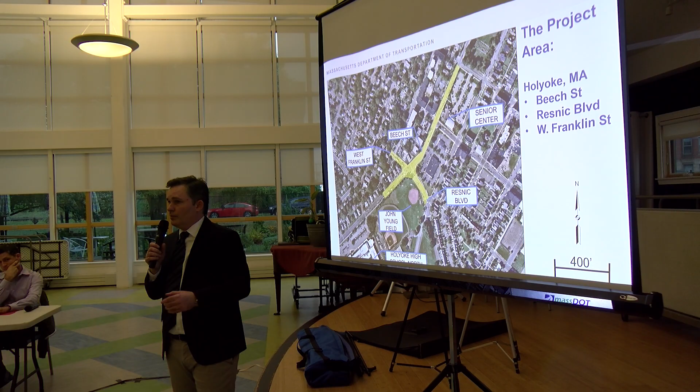Touching on what I referred to earlier, from 2015 through 2017, this intersection—Resnic Boulevard, West Franklin Street, and Beech Street—was in the top 200 of crash rates for the state. MassDOT has a program called the Highway Safety Improvement Program, a federal funding program that targets unsafe intersections. This intersection qualifies for safety improvement funding from Federal Highway because of its poor safety record.

In particular, there's a high rate of pedestrian crashes at the intersection—a statistically high number of pedestrians struck by vehicles while using the crosswalks.

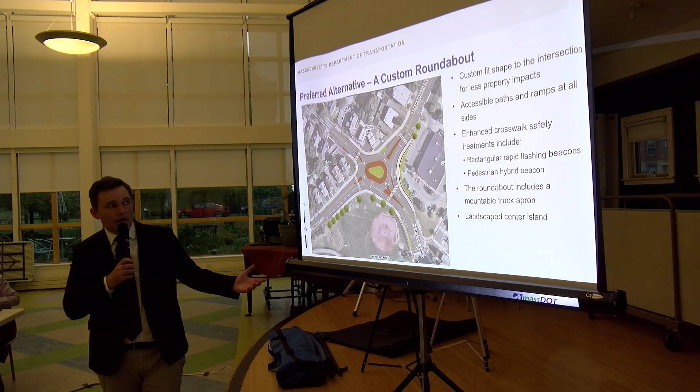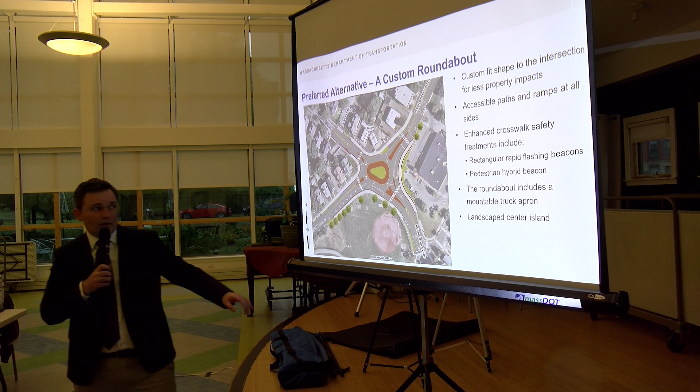The custom roundabout has a custom shape, designed specifically to fit the intersection and to accommodate the trucks that might be using it. You'll notice there are 2 lanes on the eastbound approach of Beech Street with a right turn exclusive lane. There's also 2 lanes on the northbound approach of Resnic Blvd, as there are today - we're keeping those 2 lanes. However, on West Franklin Street there's 1 lane in each direction, and on Beech Street coming westbound there's 1 lane approaching the intersection. That's all been designed based on the traffic volume at the intersection.

Where you see an extra lane, it's because there's a bit of extra traffic volume demand, and that extra lane is needed to prevent long queuing. We've also provided enhanced crosswalk safety at all 4 corners of the roundabout. 3 of the crosswalks - Resnic Blvd, Beech Street on the west side of the roundabout, and West Franklin Street - would have rectangular rapid flashing beacons. I'll show you a picture of that in a moment, but that's an enhanced type of crosswalk treatment.

Essentially, you press a button and a yellow flashing light lets drivers know a pedestrian intends to cross. The leg of the intersection on Beech Street on the east side actually has a different type of pedestrian safety measure - it's called a pedestrian hybrid beacon, which involves an overhead flashing light, adding a bit of extra safety. The roundabout also includes a mountable truck apron - the area shown in dark red color is slightly raised, but a large freight truck can mount that area to complete turns.

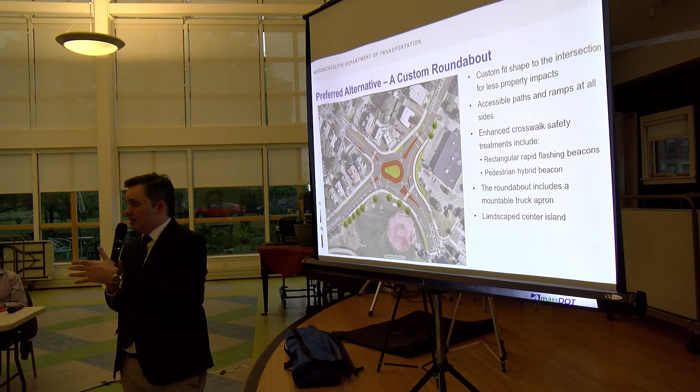The center island is shown as grass currently, but at 25% design we haven't finalized that landscaping yet, so that's something that can be refined at future design stages. We would certainly want the city to have input as to how the center of the roundabout is planted with landscaping, etc.

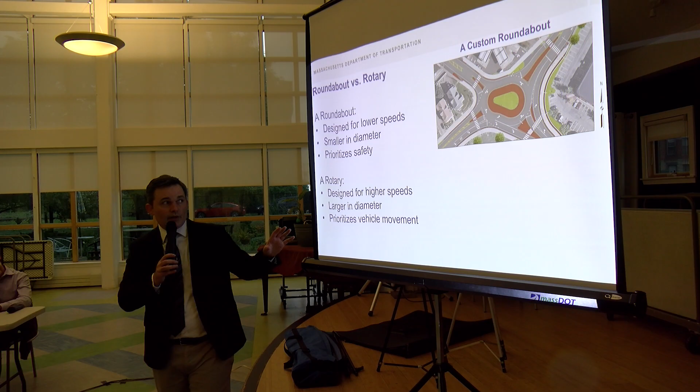I want to quickly touch on the difference between a roundabout and a rotary, since we often hear this question at public meetings. This project is recommending a roundabout, which is designed for lower speeds. It's primarily designed for safety and is less concerned with moving vehicles through the intersection quickly. A rotary is a little more old-fashioned - you don't see too many built anymore, but they do still exist in our state. They tend to be larger in diameter and try to get vehicles moving faster. They tend to be in places where fewer pedestrians actually cross the intersection, such as a highway interchange. The preferred alternative here is in fact a roundabout, not a rotary.

On Beech Street on the east side of the roundabout, we have something different called a pedestrian hybrid beacon. This is also a push-button activated overhead light, with a sequence: it flashes yellow, then flashes red, then becomes solid red, which requires cars to stop. When the pedestrian has finished crossing, it goes back to flashing red, meaning you can pass through if the pedestrian's finished. So it's a stronger safety control measure because it requires you to stop - it's not just a suggestion. But it doesn't create as much delay as a regular traffic signal because you can pass through after the pedestrian has completed their crossing.

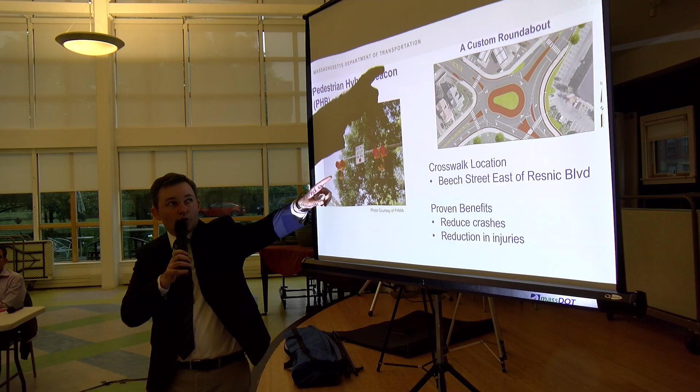The reason we needed that on the east side of the intersection is because there are 2 lanes of Beech Street exiting the roundabout, and studies have shown that when you have 2 lanes exiting a roundabout, vehicle speeds can get high, close to 40 miles per hour. So we want to keep pedestrians safe who are crossing that 3-lane crosswalk on that particular side of Beech Street, which is why we're using this enhanced safety treatment.

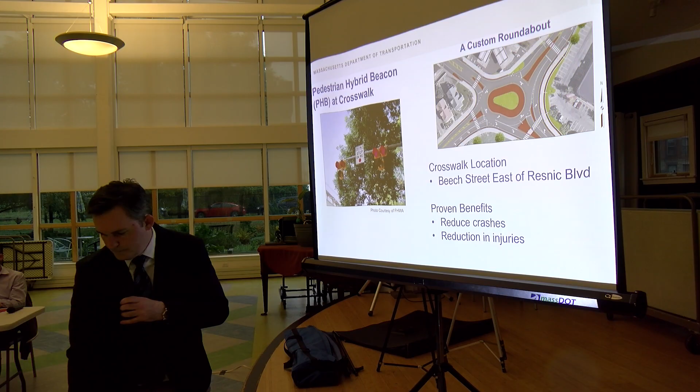I wanted to touch on trucks - I don't know if anybody here is from the fire department or school department. The roundabout has been designed so that school buses and the large ladder truck from the fire department can complete all turns without having to use the mountable apron - they can just use the regular vehicle lanes without going on the raised portion. The freight trucks will have to use the mountable portion of the roundabout. The largest vehicle this has been designed to accommodate is a 72-foot tractor-trailer truck, which is typical for a MassDOT design project and one of the largest tractor-trailers you'd see in a city context like Holyoke. That's the design vehicle.

Yes, the 40-foot bus, just like the ladder truck and the school bus, can make all turns without using the mountable apron of the roundabout.

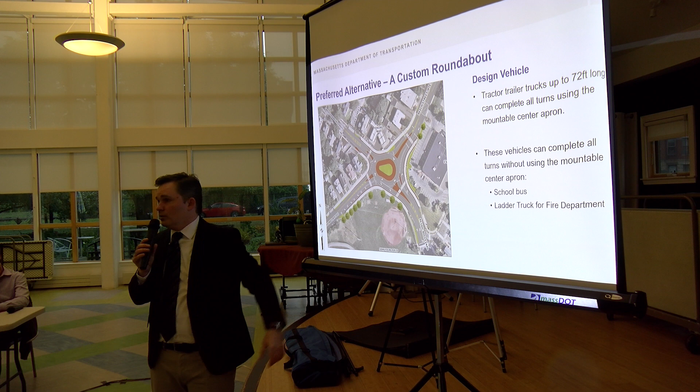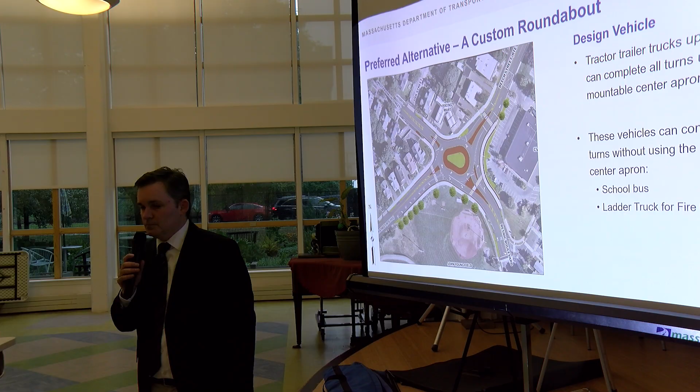The one that's on everyone's mind, I'm assuming that parade day and road race can get through there okay? Yes, the 72-foot truck is about as large as any of the floats you would see, in fact probably larger than any floats in the Holyoke St. Patrick's Day Parade.

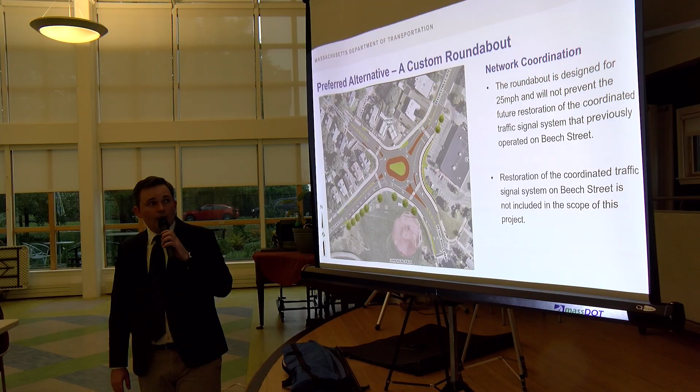I wanted to mention, we had a question from the public earlier. As many of you know, this part of Beech Street was formerly part of a coordinated signal system, pre-timed so the lights were coordinated at 25 miles per hour. That system hasn't been operating for some years, unfortunately, because the equipment is no longer working and is too old to be repaired. But this roundabout does not prevent that system from being repaired in the future. Repairing that coordinated signal system is not part of this project, but putting in the roundabout is compatible with a future repair of that system if the city so chooses.

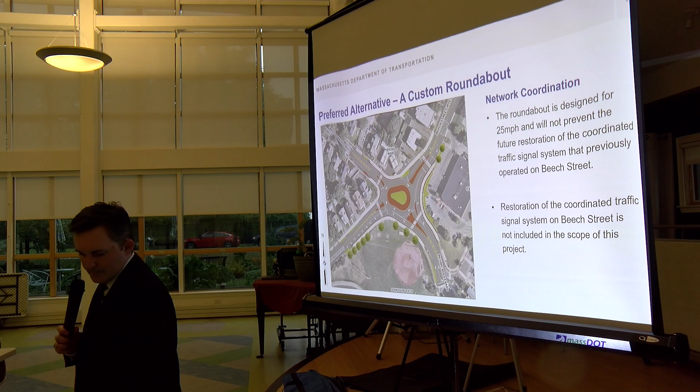Okay, so next I'm going to move around to each street leg approach to the roundabout and talk about some of the features of the design.

We'll start with West Franklin Street. As I mentioned before, this is one lane in each direction. There will be a rectangular rapid flashing beacon at the crosswalk. We have shared use paths on both sides of the road, and they have to transition back to allow bicyclists to enter and exit the shared use paths, so there are bike ramps where the shared use paths end.

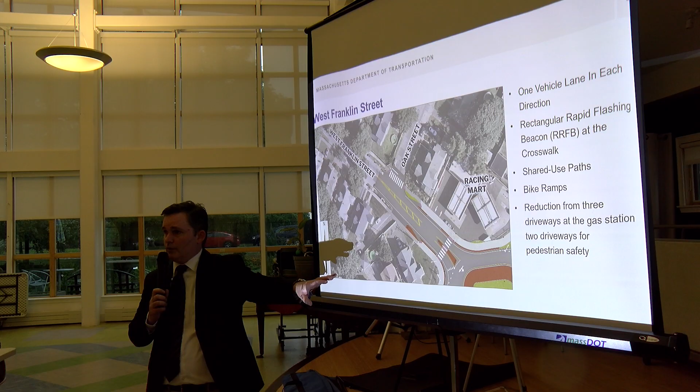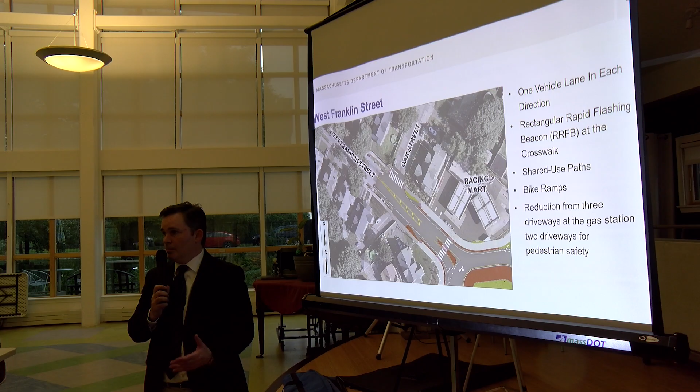Also notable on West Franklin Street: the gas station driveways currently have 3 curb cuts, and the design proposes to close one of those driveways for pedestrian safety. Formerly there was a driveway at the gas station located right here, and the design proposes to close one of the 3 driveways so that bikes and pedestrians can cross more safely.

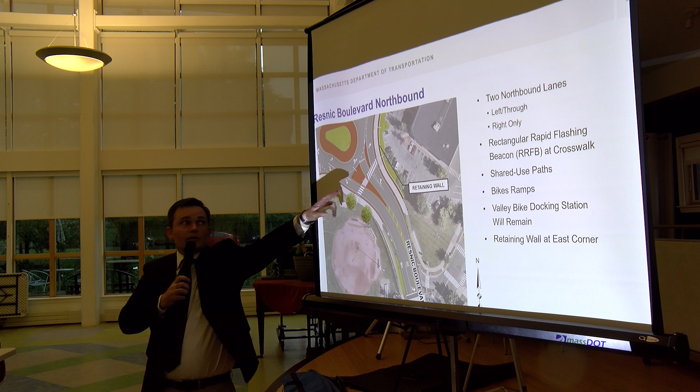Okay, moving on to Resnic Blvd. This would be used to approach the roundabout traveling north, and you can see there's 2 northbound lanes, with the rightmost lane being right turn only. There's a little mountable island between the lanes so that cars use either lane and don't try to drive over it, but large trucks can drive over it if they need to complete the right turn.

Resnic Blvd also has shared use paths on both sides with bike ramps to transition back to the street at the project limits.

I also want to mention there is a retaining wall. As some of you know, there's a hill coming down from the CVS property to the intersection, and in order to fit the design into the space, we need to remove some earth and replace it with a retaining wall next to the shared use path. That would be at the perimeter of the currently occupied CVS property - it wouldn't claim a parking space, but it would result in a wall at the perimeter of their parking lot.

Okay, let's move on to the Pine Street intersection. This is really on Resnic Boulevard at the project limits.

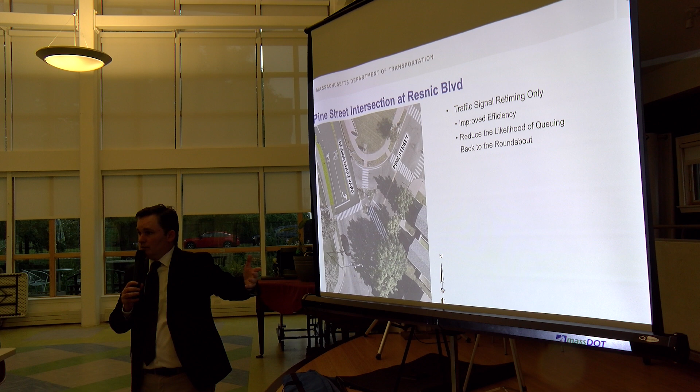At the Pine Street and Resnic Boulevard intersection, the project only proposes to retime the existing traffic signal here. This is also where Holyoke High School has an entrance and exit, so the traffic signal would be retimed. That equipment is fairly new, I think less than 10 years old, so it can be easily retimed to better work with the roundabout as part of this project. We want to prevent cars from queuing at this signal and spilling back into the roundabout, so we have to make some timing adjustments here, using the latest traffic counts to optimize operations at the intersection.

Okay, let's go to Beech Street on the west side of the roundabout.

There are 2 lanes, so we have a right turn only lane. This would be a change from the existing condition. As you know, today the rightmost lane is both a through lane and a right turn lane, and this design would change that lane into a right turn only lane. If you want to continue through, going east on Beech Street through the roundabout, you would need to use the center lane to go through the roundabout.

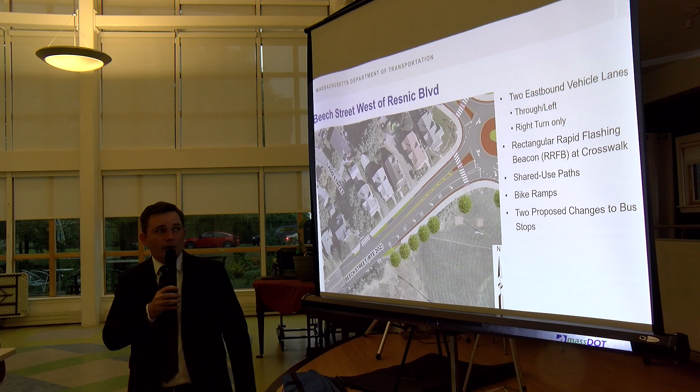Also, on Beech Street, there are shared use paths on both sides with bike ramps to transition from the street to the shared use paths. And there are 2 proposed changes to 2 existing bus stops on this side of Beech Street. I'll have a diagram to show you exactly what those changes are, but I just wanted to mention there are 2 changes to bus stops.

Oh, and here's the slide. Okay, so right now on this part of Beech Street, there are 2 existing bus stops. Stop number 440 is close to the intersection of Resnic Boulevard and Beech Street, on the northbound side of the road. The bus that serves these 2 stops is Route B23 in the PVTA system. That bus stop, 440, is proposed to be relocated to a new accessible bus stop in front of Holyoke

High School. The reason being that keeping the existing bus stop that close to a roundabout is complicated in terms of operations. Also, we coordinated with PVTA operations, and they looked at the use of these 2 stops and recommended that this was something we could do to mitigate the movement of stop 440 — to create a new stop in front of Holyoke High School.

Across the street, stop 436, headed in the southbound direction for bus B23 — when we talked to PVTA, they recommended that since it's so close to existing stop 448, near the intersection of Beech Street and Linden Street, we could consolidate stop 436 to the location of stop 448. We would have to upgrade stop 448 to be fully accessible as part of this change.

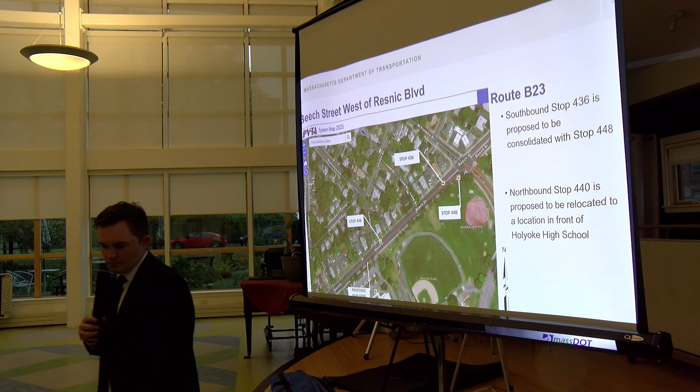All right, so moving on to the leg of the intersection, we're on Beech Street on the east side of the roundabout. This is where the CVS driveway is. We have 2 lanes exiting the roundabout, proceeding northeast on Route 202.

There is another change here in lane configuration. At Sargeant Street, as you know, the rightmost lane today is right turn only, and this design would change that to both a through and a right turn. The center lane would be a through and a left turn. So this increases the lanes you can use to proceed on Beech Street through Sargeant Street. The reason for the change is that we needed a little extra capacity to move vehicles northeast, to prevent them from queuing back into the roundabout.

As I mentioned earlier, the safety treatment at the crosswalk on this side of the roundabout would be the pedestrian hybrid beacon. There would be a 'don't block the box' pavement marking at the CVS driveway, to help prevent vehicles queuing at Sargeant Street from blocking the CVS driveway — a special pavement marking on the ground asking vehicles not to stop and block the driveway. This side of the intersection also has shared use paths that transition back to the lanes at the edge of the shared use paths, with bike ramps.

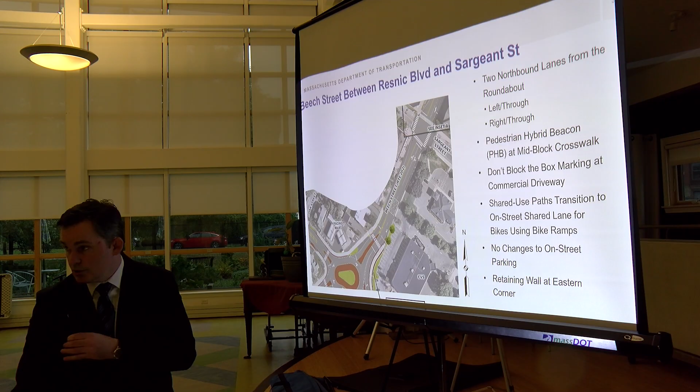Let's talk a little bit about the Sargeant Street intersection at Beech Street. As I mentioned before, we have the lane configuration change — 2 through lanes on Beech Street going northeast through Sargeant Street. We would also retime the traffic signal equipment here to try to prevent vehicles from queuing and reaching the roundabout, using the existing signal equipment and retiming it. You'll notice that passing through Sargeant Street on Beech Street, those 2 lanes exist but soon merge back to 1. We'll see that on the next slide.

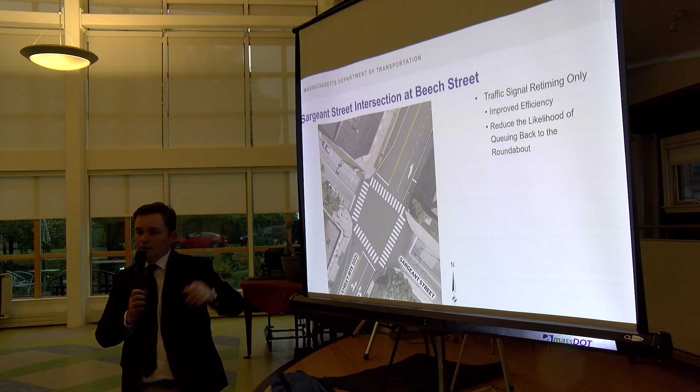So here we are. This is Beech Street between Sargeant Street and Hampshire Street.

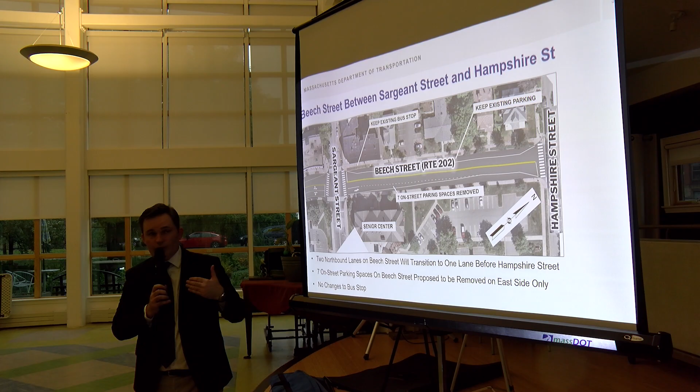You can see we've got the 2 through lanes at Sargeant Street, and then we have a taper. That taper is designed to be safe for the speed limit of the road. It tapers back to 1 lane if you're traveling northeast by the time you reach Hampshire Street.

I do want to mention, this is where we are seated today, passing the senior center. In order to fit in the safe transition lane, going from 2 lanes back to 1, it would remove 7 on-street parking spaces on Beech Street on the senior center side of the road only. Luckily the senior center does have a large surface parking lot, a fairly new one, so hopefully that helps mitigate the loss of those 7 spaces.

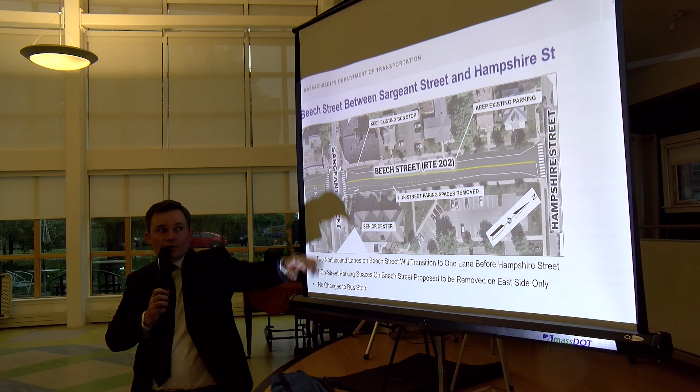I do want to mention on the opposite side of the street, there's a bus stop and on-street parking, and we're proposing no changes to either the bus stop or the on-street parking on the residential side of Beech Street here in this area.

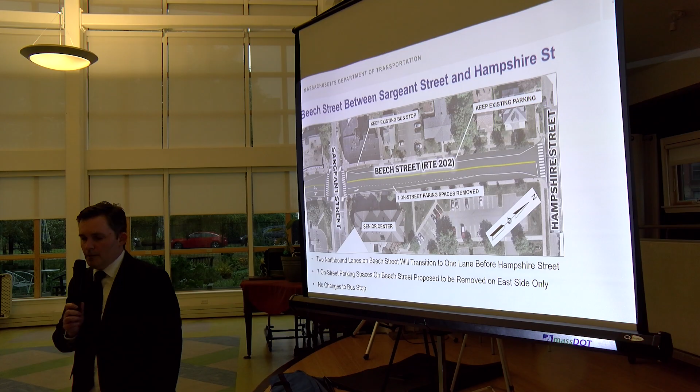So we've stepped through the different legs of the design. I hope that gives you a good sense of what's being proposed. The next part of the presentation is going to talk about right-of-way impacts. How will your property be impacted?

First I should mention that the City of Holyoke is responsible for acquiring all necessary rights in the public land for design. Even though this is a MassDOT design and MassDOT will be funding construction, the city actually has jurisdiction over all roads in the project area, so they're responsible for acquiring any rights to property needed to complete the design.

The types of right-of-way things we're talking about could be a fee taking, a permanent easement, or a temporary easement during construction. The project does propose all 3 types of those right-of-way impacts.

As I mentioned, we do have right-of-way plans with us tonight. If you'd like to get a close look at the plans on the table in this corner, we do have paper copies that you can view.

Affected property owners would be contacted by personnel from the City of Holyoke approximately during the fall, winter of 2025, 2026. That would be the first contact. It's a process that takes some time, but that would be the first time property owners could expect to be notified.

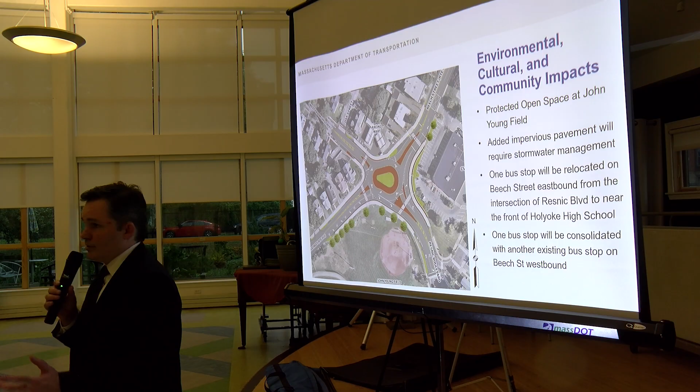As I mentioned, there will be a bus stop relocation, one that will be consolidated with another existing stop, so that counts as a community impact that you should be aware of. Okay, so that's the list of impacts that we want to bring to your attention.

Okay, so now let's talk about construction. We're at 25% design, but we can already tell you some things about what would happen if the project reaches construction. This would be designed, then bid to public contractors, and then built by a separate construction contractor. That process is overseen by MassDOT and subject to all state rules regarding construction bidding, etc.

The city would contact property owners beginning in the winter of 2025-2026, as we mentioned. That would be when you could expect to first be contacted regarding right-of-way impacts. The design is expected to be complete by spring-summer 2027, so we have a bit more time, and there may be some adjustments to the design between now and then. As I said, MassDOT likes to check the design at various stages, so there's going to be a lot of reviewing of the design between now and 2027.

The construction would begin in the fall or winter of 2027 if all goes to plan. That's the current schedule we're on. The construction would then last between 2 and 3 years, so you could expect an opening date between 2029 and 2030 for the project. It requires a little bit of patience.

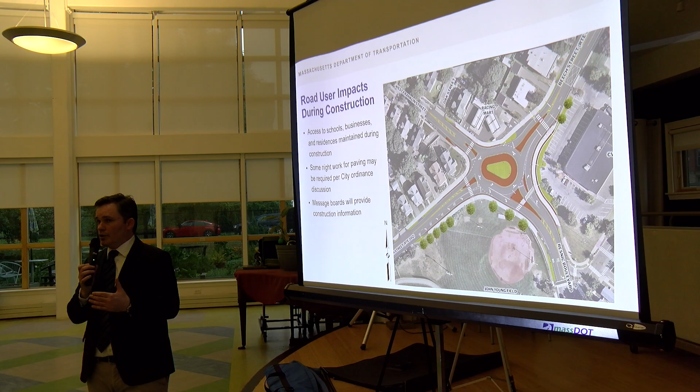This project may also require some night work for paving, and the terms and hours that contractors are able to work would be regulated by the city's rules as to how late night work can proceed and when. There would also be dynamic message boards put up at the limits of the project, letting the public know key dates and milestones during construction.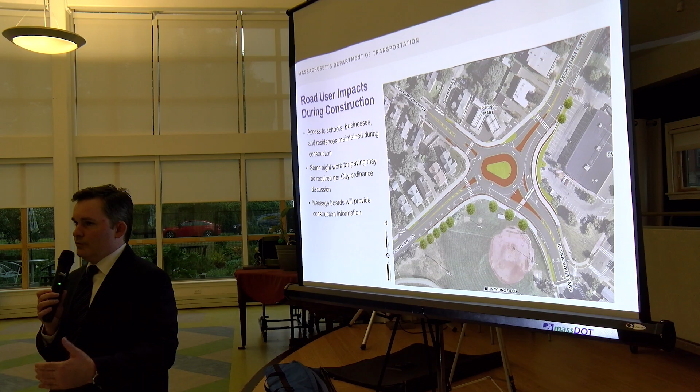We're getting close to the end of the presentation. Let's talk about next steps. So here we are—we are at the 25% design public hearing.

The next milestone would be the spring of 2026, which would be the beginning of the 75% design. The 75% design starts with the public comments from the 25% stage, and the first step is to try to address or incorporate those public comments from tonight—you can comment after this meeting as well—to accommodate those comments in the 75% design. That's the next stage.

Following that, during the spring of 2026, there's a number of environmental permits that would need to be completed for the project. During the spring and summer of 2027, we expect to complete the design and gain full approval from both MassDOT and the City of Holyoke. The project would be advertised for construction, anticipated fall/winter of 2027, as we mentioned. So those are the key next steps.

For contacts and more information after tonight's meeting, you can contact the City of Holyoke, specifically the City Engineer, Matt Sokop, who's here tonight. We have his email and phone number here, and he also has his page on the city's website. You could also follow the City of Holyoke social media and website to find out about any future events hosted by the city pertaining to this design.

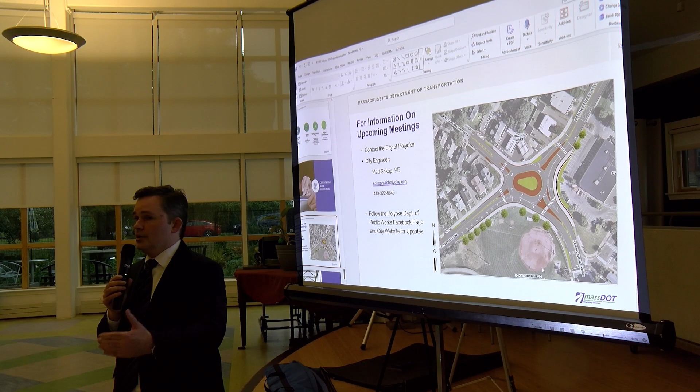Plans for the project can be viewed in person at the City Engineer's office by appointment. If anyone wishes to do that after tonight's meeting, the process would be to contact the City Engineer and make an appointment to view the plans in person.

We've reached the question and discussion part of the evening. I would invite John Freeman, the MassDOT project manager, back up to let you know how that process works. Thank you.

Before I open the hearing to questions and comments, I would like to explain the hearing procedure. First, the purpose of this hearing is to solicit your input regarding this project. As the plans are not yet complete, we may not be able to answer all of your questions or respond to all of your comments at this time. Next, we ask that anyone who wishes to have his or her comments entered into the official hearing transcript please stand up, identify yourself by name and affiliation—whether you are an abutter, local official, or concerned citizen—and spell your last name. This is necessary in order for us to obtain a full verbatim transcript as required by law.

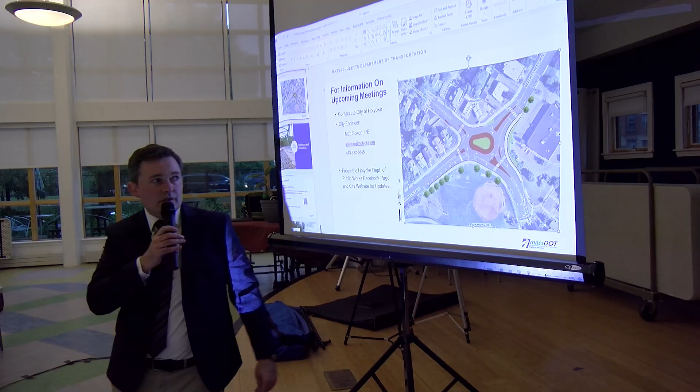Also, I want to mention at the crosswalks, specifically on Resnic Blvd, you can see the space between the crosswalk and the yield line at the roundabout. We have to allow the distance of at least one car so that people approaching the roundabout look for the pedestrian first, and then after they cross, all they're looking at is the oncoming vehicle in the roundabout. So that spacing is intentional so you don't have a car simultaneously looking at a pedestrian and an oncoming car.

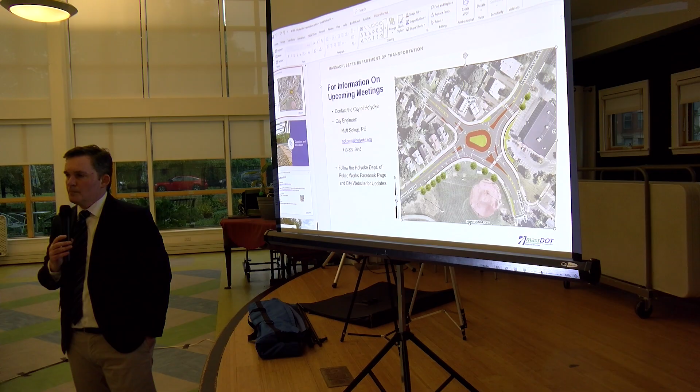Especially during school time in the morning, because I come down West Franklin every day, it gets congested there with kids crossing and a lot of traffic coming down. Most people taking a right there are looking left up West Franklin, and they don't even do a rolling stop, they just go on red every day. It gets a little precarious there with kids in the morning and traffic. Just something to be aware of.

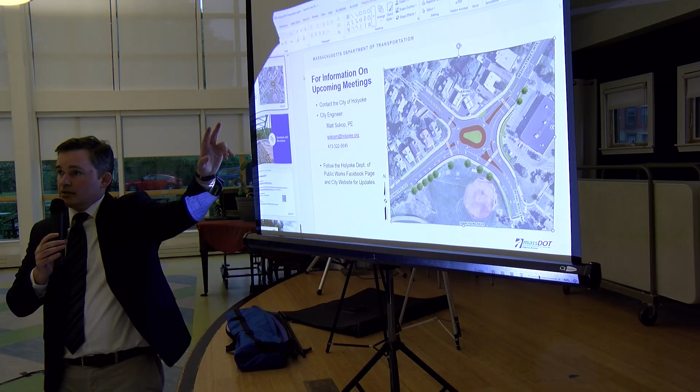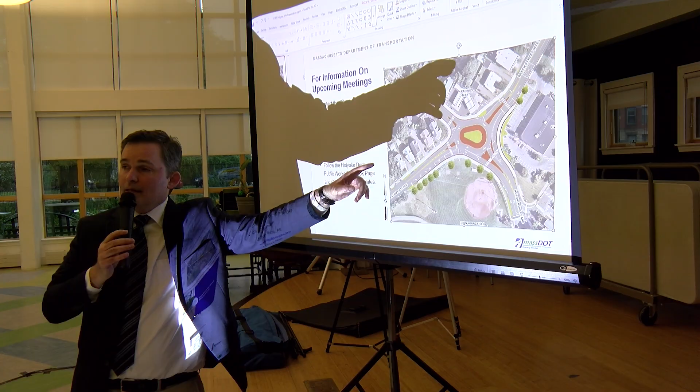Yeah, no, it's a good point. This came up a lot in the design, specifically on Resnic Blvd. Today, that right lane is a right turn only, and we find cars are trying to merge left as soon as possible on Beech Street so they can continue through. The fact that we've now made two through lanes on Beech Street means you no longer have to enter from Resnic Boulevard and immediately merge left. That gives drivers a little less to look at—they can turn right and stay in that lane a little longer. We're hoping that helps the issue as well.

Hi, my name is Jordana O'Connell. I'm a concerned citizen.

I'd like to know what the plans are for the alternative streets. People will avoid this roundabout, especially during peak busy season times, and there needs to be a plan for those other streets because people will be speeding down those streets. There will be kids walking down those streets. I'd like to know what the plans are.

Well, I would just repeat what we have shown: this roundabout would actually reduce delay and reduce queuing at the intersection, so it would not give people a logical reason to avoid it. They can still avoid it if they choose, but in terms of traffic operations, we've proven it performs better than the existing signal, and that's part of the requirement for reaching 25% design stage. So we don't have evidence that this would be a worse performing intersection than the existing one, and for that reason we haven't predicted that people would try to avoid it. It may actually slow people down going through it for safety. If people are speeding on other streets around it, we'll have to address those issues at that time, but currently the only plans we have are for this intersection.